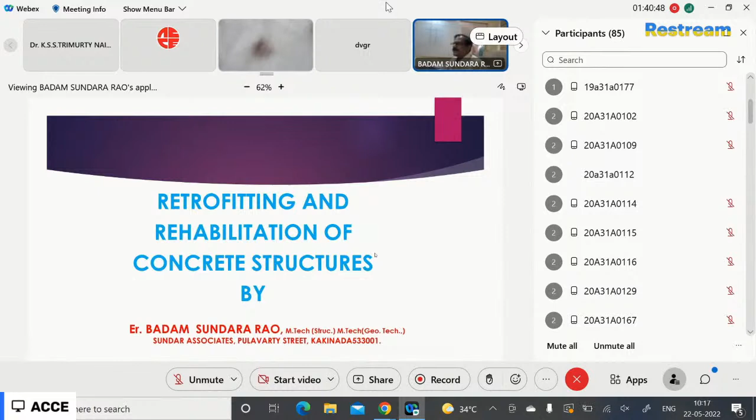This aspect also all engineers should remember. I'll conclude within 10 minutes, because our Trimurty Naidu garu has given me only 10 minutes time. No sir, take 10 minutes or 15 minutes, 20 minutes, sir, continue, no issue. I'll close at a faster rate, sir. Okay, not necessary, continue sir, no issue. Thank you, thank you.

The engineering which involves modifying existing buildings for structural behavior without hampering its basic intent of use is termed as retrofitting. Just reading out the definition, and I'll go through the explanation later. It becomes necessary to improve the performance of structures, including those facing loss of strength due to deterioration or which have crossed their anticipated lifespan.

The realization of retrofitting depends on the authentic cause and measures adopted to prevent its further deterioration. This development includes repair, retrofit, renovation, and reconstruction wherever required. Here, retrofitting may not always be the solution. Sometimes total reconstruction may be resorted to. That also we have to consider. There is a chance 100% retrofitting may not function well. In such cases, reconstruction is also to be opted.

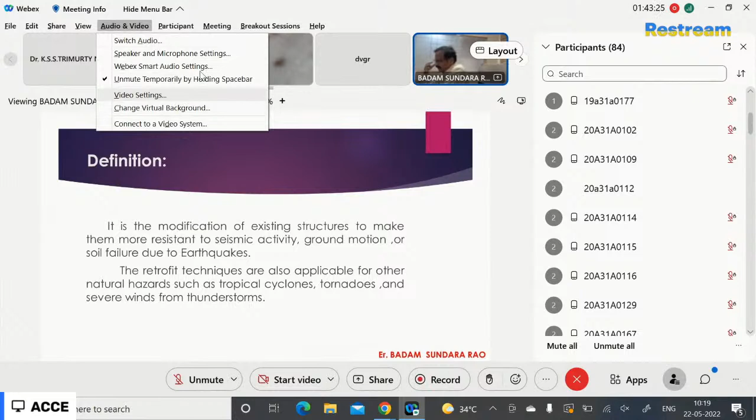It is the modification of existing structures to make them more resistant to seismic activity, ground motion, or soil failure due to earthquakes. One thing I have to say is that our Kakinada, or East Godavari, or if you take entire Andhra Pradesh, only from Srikakulam to Yalamanchili is in zone 2. The remaining entire Andhra Pradesh is now in zone 3.

But if you take the previous earthquake zoning, entire Andhra Pradesh was in zone 1. Though the buildings which were designed by the same engineer in 1990 may not be safe now based on the present earthquake zones. Likewise, the wind pressures also changed.

Previously, 150 kmph was the wind load taken into consideration, but now for sea coast areas, 200 kmph is minimum, and the K4 factor, which was introduced recently, is added. That K4 factor for sea coast area will be about 1.3. So in a simple manner, the wind pressures to be designed for are at 260 kmph. So from 150 kmph to 260 kmph, there is a drastic increase in the wind calculation.

Based on these parameters, if you want to check the structural stability, if they fail, there are so many methods to retrofit them. So though the building is presently healthy, from this changed structural environment, you have to redesign and retrofit the structures. The retrofit techniques are also applicable for other natural hazards such as tropical cyclones, tornadoes, and severe winds from thunderstorms.

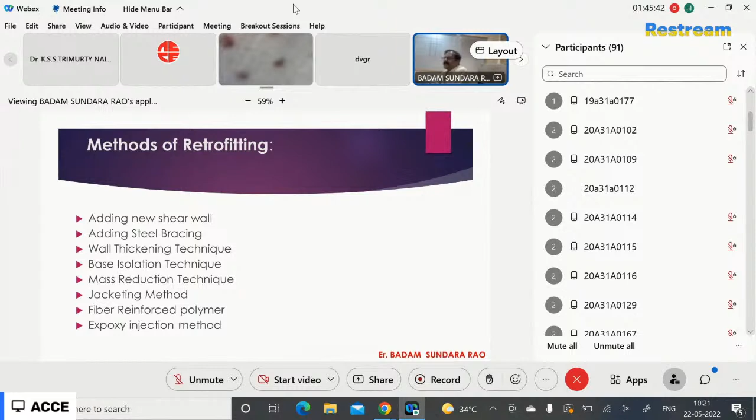Where can we apply this? For exterior walls, floors, roofs, to the ground foundation.

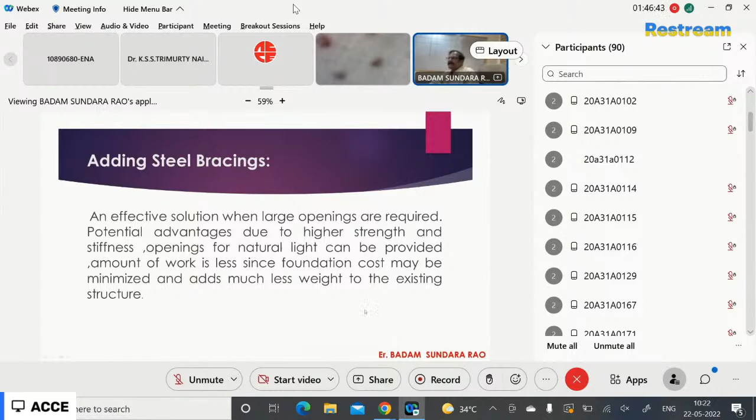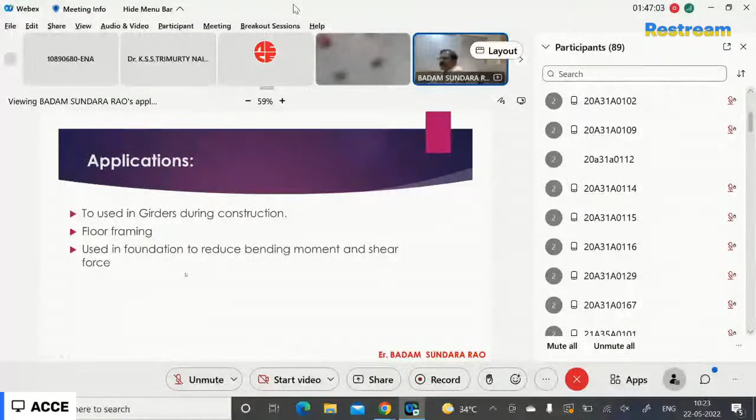This is a very effective method and most popular method also, to be used in girders during construction, floor framing, used in foundations to reduce bending moment and shear force.

Where can we apply this? For all RCC buildings, this technique can be adopted.

Applications: it can be applied in residential buildings, buildings of historical importance, monuments, bridges, etc. It was firstly implemented in New Zealand in 1974 and was first enforced in India in 2001 after the Gujarat earthquake. LA City Hall, with a height of about 138 meters in Los Angeles, is the tallest base isolated building in the world.

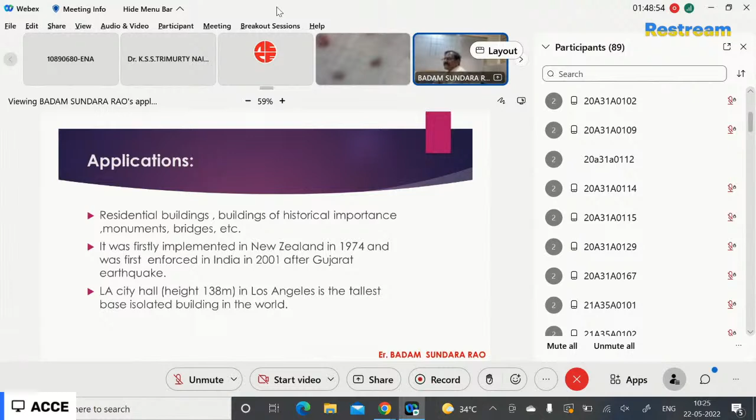Next is the mass reduction technique. In this method, for instance, by removal of one or more stories as shown in the figure, it is evident that the removal of mass will lead to a decrease in the loading, which will lead to a decrease in the required strength.

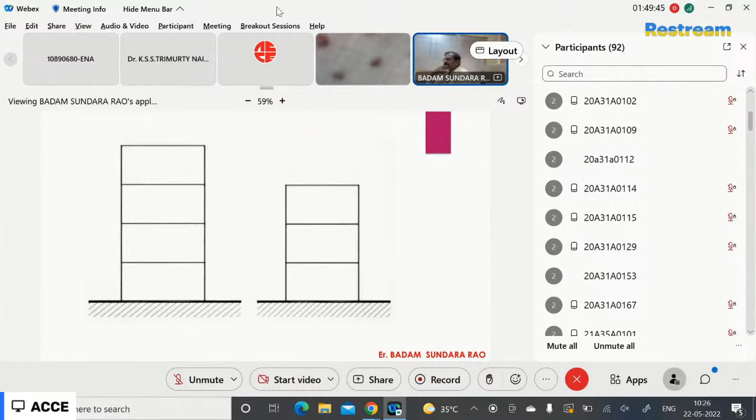Here it is a four-storied building. Because of this failure, what can be done is by reducing one floor, the building can be kept in a safe position. This is the technique which we have suggested for one building in Kakinada, which has got some settlement. But till now the owners have not taken any decision on that. When the calculations are made, we found that by removing one floor or 1.5 floors, the structure can be kept in a safe condition.

This is also a good and ideal method where the retrofitting cost is not to be incurred. In such cases, removal of one floor or two floors, depending on the load parameters and load calculations, is also an ideal technique.

Next is the jacketing method. This is the most popular method of strengthening of buildings and columns. There are different types of jacketing: steel jacketing, reinforced concrete jacketing, and fiber reinforced polymer composite jacketing.

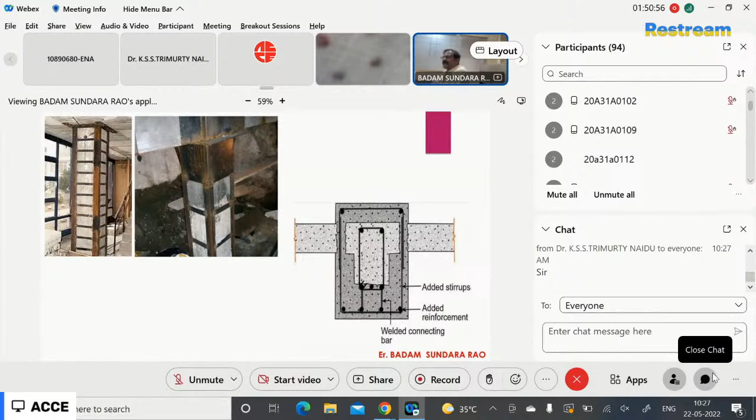This is the RCC jacketing. This is the most common, and we did this type of work for several old buildings which were retrofitted successfully, and they are performing very successfully. The same thing is suggested for this building which was supposed to be dismantled behind this Devi multiplex, but unfortunately that is in court, and till now they have not made any retrofitting.

These applications can be for columns, piers, piles, and may easily be employed in underwater applications also.

Next is fiber reinforced polymer. It is a relatively new technique to strengthen and repair damage of the structure. The application of FRP in concrete structures is being investigated for its effectiveness in enhancing structural performance both in terms of strength and ductility.

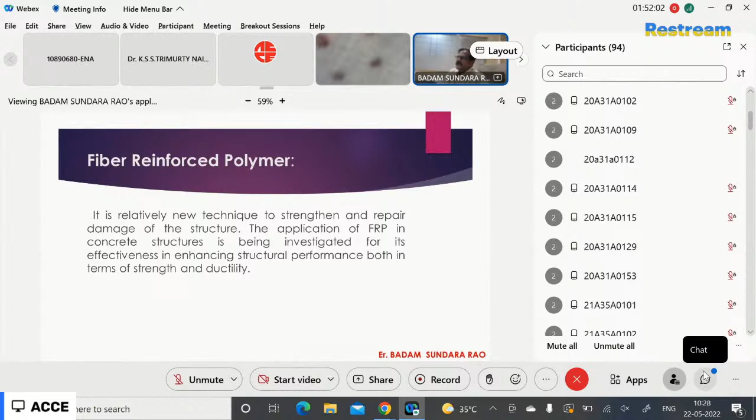This is one method, the carbon wrapping method. This is also very popular, and this technique was adopted for a bridge on the road going towards the airport to Rajahmundry. For that small bridge, retrofitting was done with carbon wrapping.

In Kakinada, the Hope Hospital building was first designed as a hotel project, and subsequently that was converted into a hospital. After that, the hospital people required one canteen building. To accommodate the canteen building, a galvalume sheet structure was proposed by us, and for that structure we retrofitted the beams with carbon wrapping in the ground floor, and that performed well. Still now, it's almost 6-7 years old work, and this has given excellent results without disturbing the entire building.

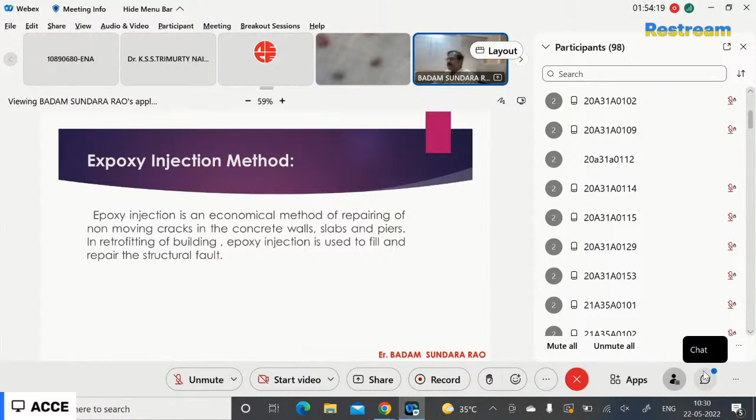Epoxy injection method is an economical method of repairing non-moving cracks in concrete walls, slabs and piers. In retrofitting of buildings, epoxy injection is used to fill and repair structural faults. This is a simple method and it is very effective where cracks are developed, giving excellent results. The applications are concrete walls, slabs, columns and piers.

Now coming to rehabilitation of concrete structures. Since very long, researchers have been investigating how to strengthen and rehabilitate structures, considering the deteriorating state of existing concrete and masonry structures worldwide. It's the need of the hour to find effective and economical techniques to rehabilitate old structures. Rehabilitation means to increase mechanical strength and durability. It can be measured by evaluating the deformation capacity of various retrofitted components of the structure. It is necessary to know the loadings, both functional and environmental, that the structure will have to withstand in future.

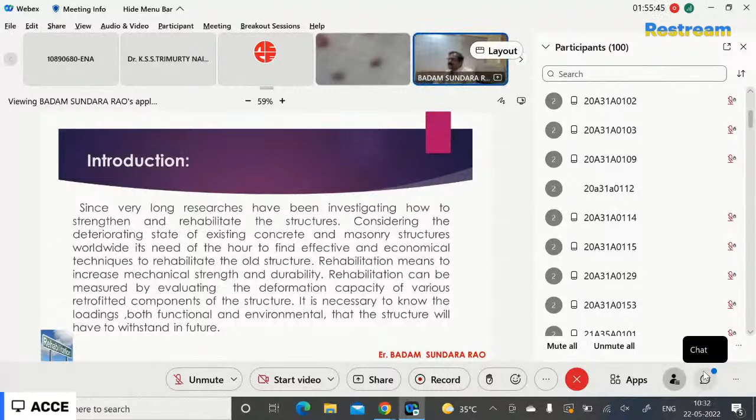One should remember that retrofitting and rehabilitation are not separate, they are together. Retrofitting is the process of rehabilitation. It means to increase the mechanical strength - tensile strength, compressive strength, flexural strength, shear strength, etc. - and durability. Durability is a very important aspect. It can be measured by evaluating the deformation capacity of various retrofitted components of the structure.

The methods of rehabilitation are guniting, shotcreting, concrete stitching, resin injections, dry packing, polymer impregnation, and vacuum impregnation.

Guniting refers to an artificial mixture of cement, water and sand applied to a mold to produce a dense, hard protective layer. Gunite is used to line tunnels and structures for construction applications such as sealing cracks, fissures and areas that could be sources of leaks and structural instability. Here you can see the application of guniting, where it can be used for sealing cracks, tunnels, fissures and areas.

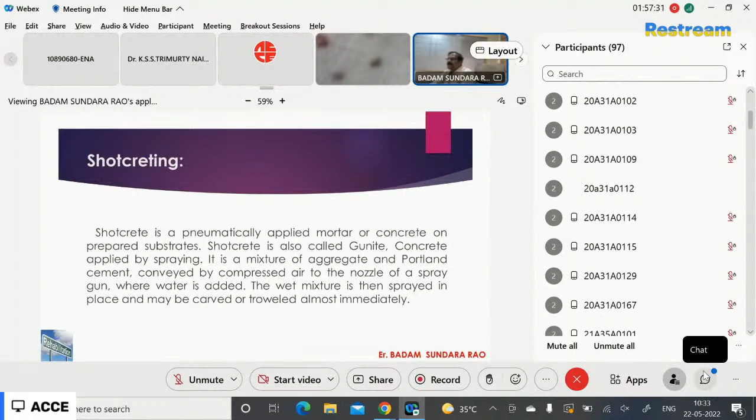Shotcreting is a pneumatically applied mortar or concrete on prepared substrates. Shotcrete is also called gunite. Concrete applied by spraying is a mixture of aggregate and Portland cement conveyed by compressed air to the nozzle of a spray gun where water is added. The wet mixture is then sprayed in place and may be carved or troweled almost immediately. This is a photograph of the process. It can be applied for concrete structures, high velocity, primarily on a vertical or overhead surface.

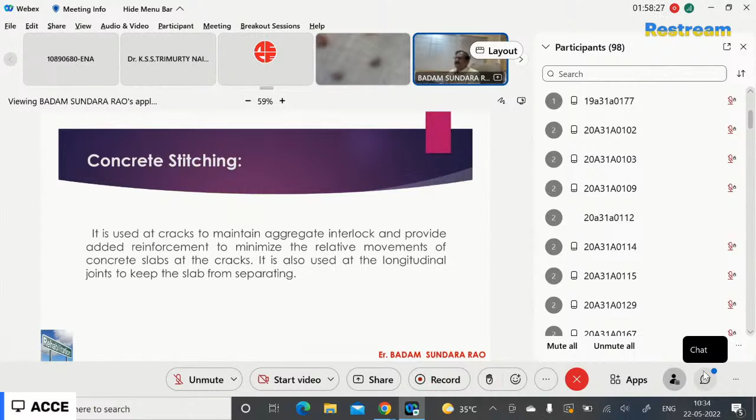Concrete stitching - where cracks are there, this stitching, like cloth stitching, can be done. This is also a very old technique, but still it is under usage because of its advantages. It is used at cracks to maintain aggregate interlock and provide added reinforcement to minimize relative movements of concrete slabs at the cracks. It is also used at longitudinal joints to keep the slab from separating. This is a photograph where this stitching can be adopted. The applications are in CC pavements and in slabs.

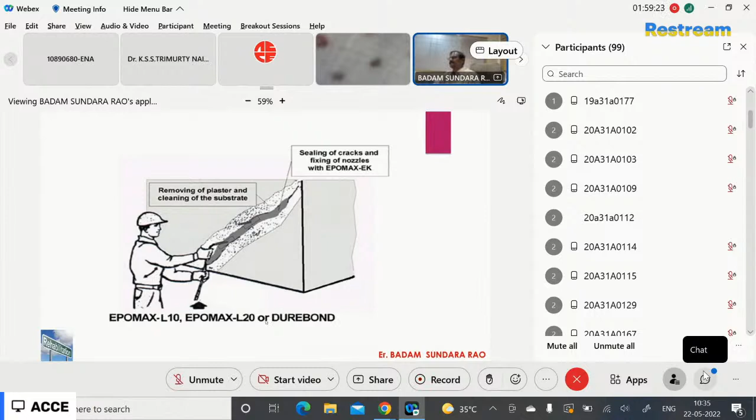Resin injection method is a form of grouting used for repair or reinforcement of underground pipes or tunnels. The process involves pressurized injection of material into cracks or other defects as part of trenchless rehabilitation efforts. Here, plastering is to be removed and the surface is to be cleaned. After that, sealing of cracks and fixing of nozzles with Epomax EK, Epomax L10, L20, Durebond, or equivalent. Applications are new built projects or existing structures, construction joints, and to provide a waterproof curtain behind the structural envelope. In such cases also this can be used.

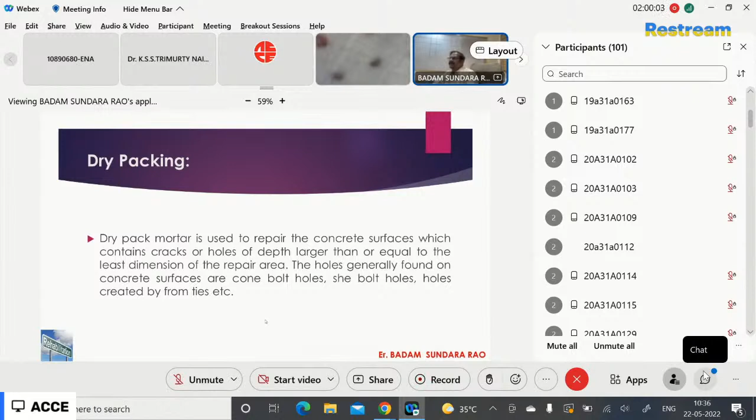The dry packing method: dry pack mortar is used to repair concrete surfaces which contain cracks or holes of depth larger than or equal to the least dimension of the repair area. The holes generally found on concrete surfaces are cone bolt holes, she bolt holes, and those created from form ties, etc. In such cases, this dry packing technique can be adopted. Applications are tile and brick placement, bed shower installation.

Next is polymer impregnation. The pre-polymers, low viscosity liquid monomers, are partially or completely impregnated within the pore system of the hardened cement composite structure. This is the method. Applications are bridge decks, irrigation structures, structural members, marine and underwater applications, nuclear power plants, sewage disposal works, waterproofing structures, impregnation of ferrocement products, etc.

Another method is vacuum impregnation, also known as porous metal sealing or porosity sealing. It is a process used to seal porosity in metal casting via the application of vacuum pressure. Vacuum impregnation can be effective in eliminating microporosity and macroporosity. The system to be adopted is always dependent on the requirement; based on that, the method is to be decided. This method is applicable for insulation systems and metal casting. Thank you.

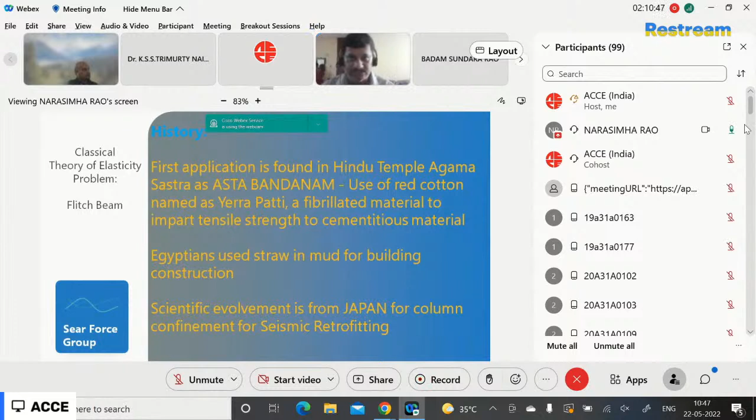But coming to the scientific evolution, the Japanese were the first to introduce this concept, in the form of retrofitting of a building structure that was seismically damaged. As a part of forensic structural engineering, they analyzed the building structure and found that the building was under-designed, and they wanted to retrofit the building. For that retrofitting, they tried the FRP wrapping system, and that was the first application in the modern engineering concept.

That is, we can see the ancient application is from the Asta Bandanam to the modern application of retrofitting by the Japanese, where they retrofitted the columns of a building structure. This concept of FRP is not new to the world. In the classical theories of elasticity, we have a problem with the flitch beams, in which the traditional timber structures are sandwiched with the steel plates.

That is, the wooden joist that was there was sandwiched in between the plates. The external ones will be the steel plates, and the internal will be a wooden joist. That may be a distressed wooden beam or a new beam. To strengthen that wooden beam, the steel plates were used. This is called the flitch beam concept. This is the traditional strengthening material that we have in the classical theories of elasticity. That same concept was adopted in the development of FRP systems.

That is nothing but the FRP system is not new concept-wise, but in the technology there are a lot of improvements that lead to a drastic evolution, especially in the engineering part of this question.

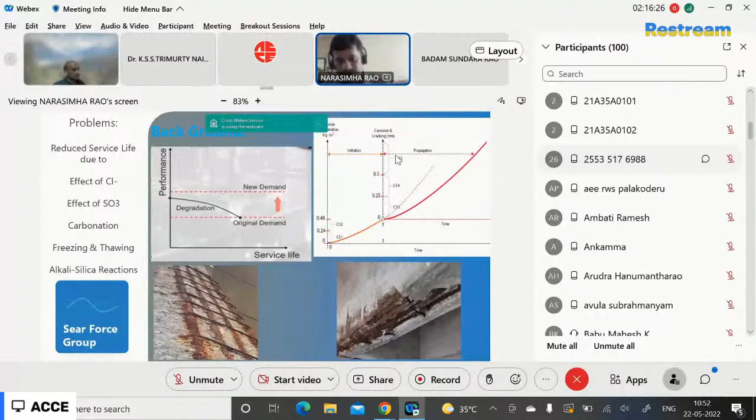The bottommost figures show chloride ion diffusion corrosion, which is the most common corrosion the world is facing. The entire world is almost covered with sea coast. In India too, we call it Peninsular India, Jambu Dvipa in ancient times, in which we have the largest sea coast. The first one is the Gujarat sea coast. After that, AP has the second largest sea coast.

Chloride ion diffusion is much more significant in determining the detrimental effect on any building structure, that is, the damage, when compared to other types of degradation like sulfates or carbonation. Carbonation is also there in combination with the chlorides. But when compared to alkali silica reactions and freezing and thawing, the chloride deterioration that concrete structures are facing is much more rapid and at an alarming stage. Therefore, this is the need of the hour for today's webinar presentation.

And the right hand top figure shows the chloride ion penetration at the initial stage, that is the initiation, and the subsequent propagation. The figure clearly shows a steep rise from the chloride initiation stage to its propagation level. That is, we have to prevent the ingress of chloride ions. Once they have entered the concrete member, the propagation is very rapid.

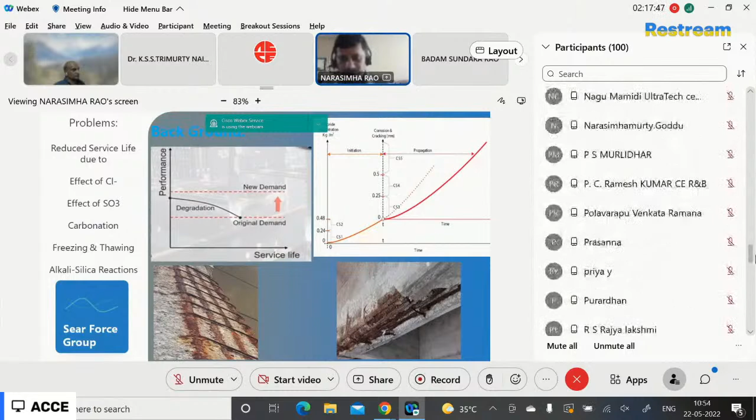Therefore, the FRP methods we have are nothing but the strengthening of existing members that were degraded, and also the retrofitting of members degraded due to various environmental effects, from the durability point of view. Fine. We'll see the exact reasons for the strengthening requirements of any structure. Just now we have seen the degradation effects and the necessity of fiber reinforced strengthening, and also the new strength requirements with respect to FRP strengthening systems.

Now we see the strengthening requirements of structures for various other purposes, like when there is an increase in the load carrying capacity. Just now we discussed a bridge designed for class A loading or class B loading, and subsequently required to be upgraded to higher loadings of class AA or class 70R. In such a case, the bridge is required to be retrofitted.

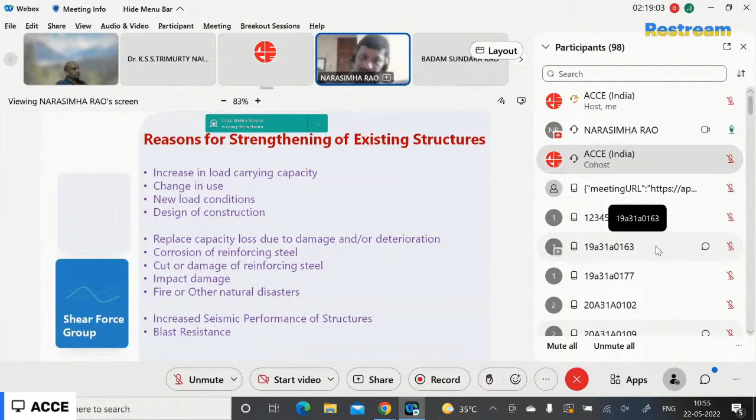Or when the building is intended for a change of use. Change of use is nothing but, originally it was designed for a residential application, and now it is modified for institutional use, like mercantile or institutions like hospitals, etc. In that, there is a change of class of loading as per IS 875 Part 2, the code pertaining to live load. Whenever there is a change in the live load classification, it definitely affects the stress level requirements in the various structural actions.

That is, the columns, beams, including the foundations and the slab system, have to survive the additional loading requirement in terms of increased live load coming on the structure. That is, an increase in the load carrying capacity. Whenever there is a change in the loading class on the structure, the building is required to be redesigned and strengthened. And also, when there is a change in use, like a change in the functionality of the building, we have to strengthen the building.

New load conditions. That is, whenever there are new load conditions, like there is a change in the

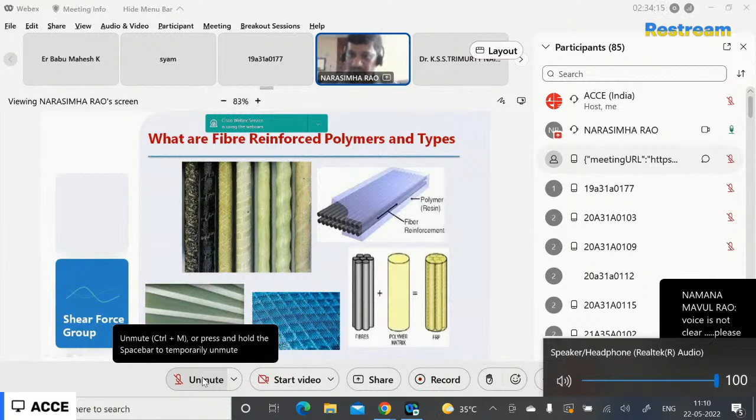Basically, a fiber reinforced polymer is a two-component material. One is in the form of a fiber reinforcement, and the second one is in the form of a polymer in which the fibers are embedded, and the fibers will be acting as one member bonded in between the polymer, the matrix we call it. This polymer will protect against environmental degradation and other effects on the fibers. Thereby, it gives some protection to the fiber reinforcement.

The main strength component is coming from the fiber reinforcement, whereas the external resin or the external matrix is to bind all the fibers that are there in the constituent. That is, in FRPs, we have two components. One is in the form of fiber reinforcement, second one is in the form of a resin matrix, which constitutes the total fiber reinforced system.

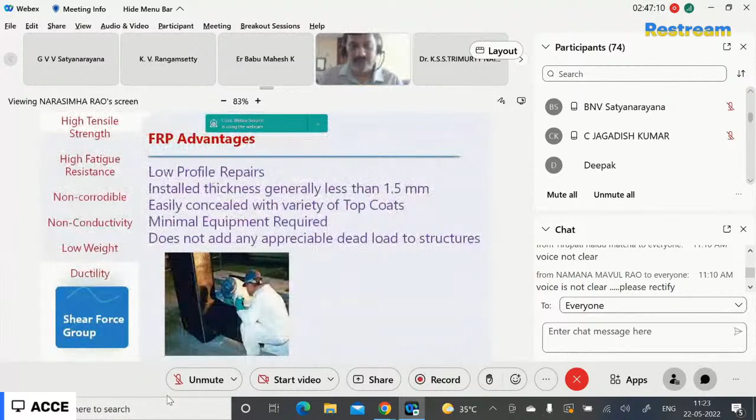What are the various FRP materials used in actual structural engineering applications? This understanding is also necessary for the selection of appropriate FRP materials. Why? Because the properties of different FRPs are different, depending upon your structural requirement—whether it is seismic retrofitting, strength requirement, or actual stress requirement. Depending upon the application and loading requirements, you have to select a suitable FRP material so that it is appropriate for the given design requirements. Generally, there are a variety of FRP materials available.

The most popular ones are carbon fibers, glass fibers, and aramid fibers. The fourth one, of somewhat importance, is basalt fibers, generally used for FRP rebar making.

Carbon fibers have very high strength, generally used for beam strengthening, and sometimes carbon fibers are used for shear strengthening of beams.

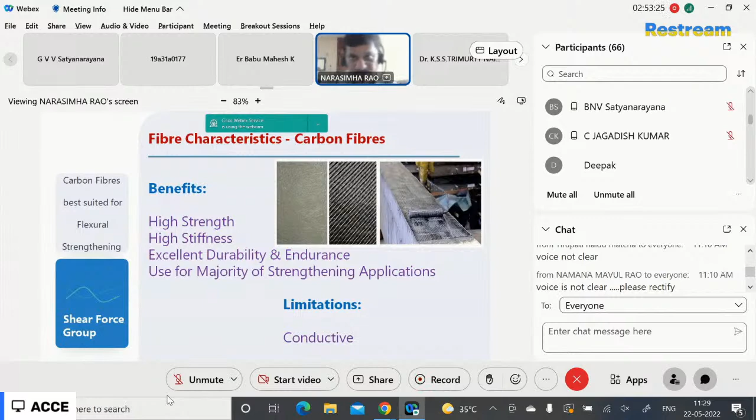And when coming to the exact requirement of such applications, for flexural strengthening applications of beams, generally carbon fibers are more suitable.

When coming to glass fiber, this is also in parallel with carbon fibers as an advantage, but the only problem is with creep. As just suggested, glass fibers will be subjected to more creep; they are highly prone to creep behavior. Therefore, only under transient loadings, like seismic retrofitting due to earthquake loading or certain other requirements, glass fiber retrofitting is suggestible.

The basic advantage with glass fibers is that they are non-conductive, hence whenever there are conductive application restrictions, glass fibers are the best suitable option. Regarding stiffness, it is somewhat lower when compared to aramid and carbon fibers. It has somewhat good stiffness, but the basic stiffness is lower compared to aramid and carbon fibers.

Regarding the matrix components, the matrix plays a very important role in transferring stresses from the parent structural member, that is the parent RCC beam, to the fibers. The fibers are the load-carrying members, taking the entire stress. But for stresses to reach the fibers, they have to be transferred to the matrix, which in turn transmits them from the RCC parent material to the fibers. Therefore, the strength of the matrix plays an important role.

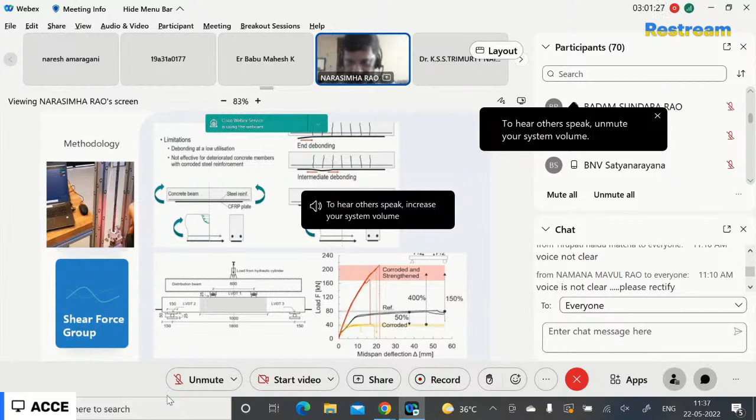The load applied at the midspan is a 2-point loading, similar to a flexural loading under 2-point test. The midspan deflections are measured with LVDT equipment. Once we measure the load-deflection response, there is a drastic 50% reduction in load when there is approximately 50% degradation of the area of reinforcement.

Once we compare this beam specimen's moment-deflection relationship to the FRP strengthened system improvement, there is an increase of 400% improvement. That concludes that the FRP system has much more advantages and efficacy in improving the load carrying capacity, that is the moment of resistance.

Almost a 150% improvement can be achieved with respect to the uncorroded beam specimen, and an increase of 400% can be attributed when compared to a specimen with 50% or 20% corrosion in the steel reinforcement. Therefore, these load deflection curves give a qualitative assessment of the improvement from FRP strengthening efficacy.

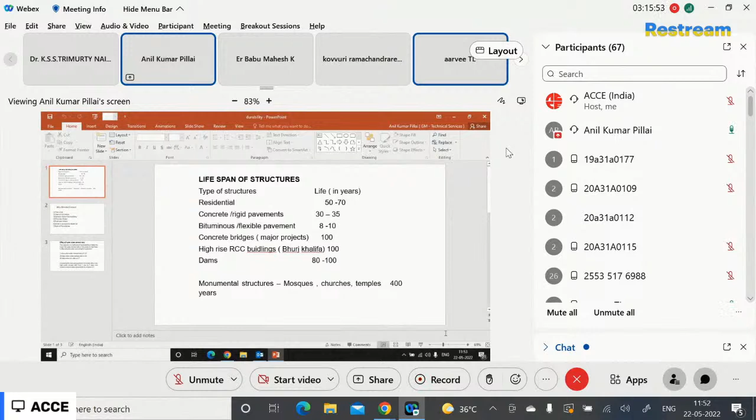Some of the structures like residential structures would be around 50 to 70 years, maybe more than that. Concrete rigid pavements maybe 30 to 35 years. Concrete bridges maybe up to 100 years. High-rise buildings more than that. And monumental structures are designed to have a lifespan of more than 400 years. So the idea is that based on the lifespan of the structure, the durability of concrete structure has to be designed, and it has to be ensured that whatever is required is implemented at site. That is one very important thing we need to keep in mind, because ultimately every client, every customer, every institution wants the lifespan of the structures to be longer and as per the designed one.

Now, to come to the specific topic of why blended cement. When we talk about blended cement, we know that blended cement means either Portland pozzolana cement or Portland slag cement, wherein some kind of blending material is added. We had ordinary Portland cement, as all of us know, which started with OPC 33 grade, then came 43, 53 grade and so on. But the idea of blending or adding some pozzolanic material like fly ash or slag started long back. It is a practice that has been there from time immemorial. And the reason is that we need this kind of adding or blending not only from the environmental point of view, but also from a qualitative perspective.

And as all of us know, the Indian cement industry as of now has more of blended cement, like more than 80% of whatever cement is being produced in our country is blended cement. It could be either Portland pozzolana cement or Portland slag cement.

So the idea behind having this blended cement is that there are certain benefits one will get, in the sense that whatever free lime is generated due to the hydration of ordinary Portland cement with water can be taken care of by the blending material. As all of us know, cement hydration produces CSH gel and calcium hydroxide. That calcium hydroxide is what we call the free lime. That calcium hydroxide is not considered to be conducive to concrete structures, so that free lime or free calcium hydroxide needs to be taken care of.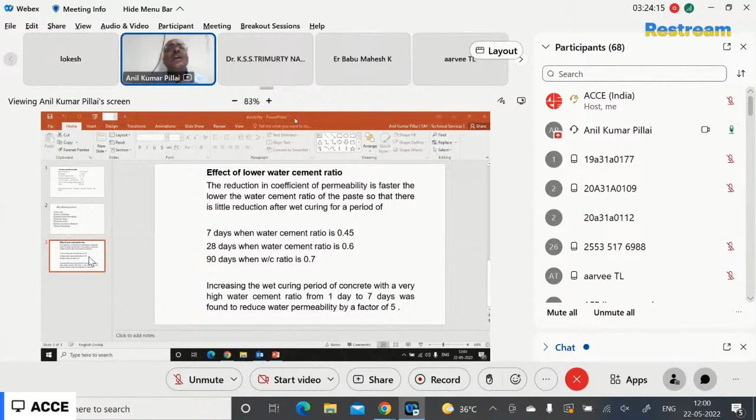Now, when we are using chemical admixtures, it is very important that we do a sufficient number of trials at site. That is how we can maintain the durability of concrete. Without that, I don't think we can maintain the durability of concrete. So I thought that I will share these very important aspects as far as durability of concrete is concerned. This is what we can take over from here.

We can do a lot of work as far as concrete mix design is concerned. We can look at economical mix designs, because when we are talking about economical mix designs, there should not be too much compromise on cementitious material content, because many times we are not looking at the exposure conditions, those we have in IS 456, ranging from mild, moderate, severe, very severe, extreme conditions.

So many times what happens is that even for the same grade of concrete, irrespective of the exposure conditions, you will find that a minimum cement content is being added, sometimes 300, 320, but if you look at the extreme conditions of exposure, 300 or 320 kg per cubic meter is not the right cementitious content. It has to be enhanced, it has to be increased. Those are the considerations we need to keep in mind to ensure the concrete is durable.

And even when we are going in for a higher grade of concrete, say for example M50, M55, M60, we will find that the upper limit of cement content is 450 kg per cubic meter. To take care of that, we have to add cementitious content, and that cementitious content is nothing but the blending materials we are talking about. So when you are using blending materials, you can go much beyond the 450 kg per cubic meter of cement content mentioned in the IS code.

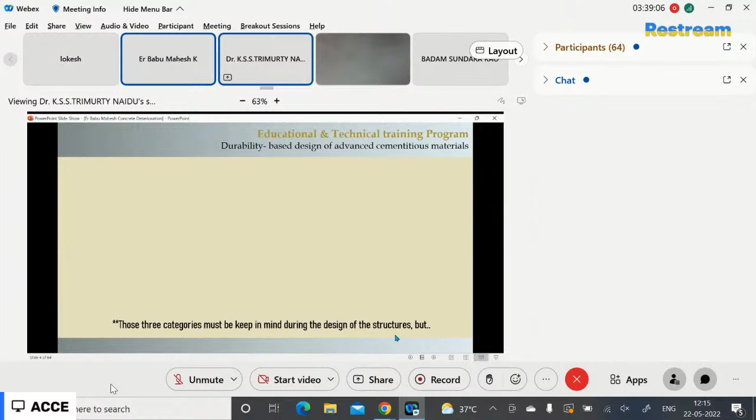Responding to the actions assumed in the design, both under persistent combinations and under accidental or exceptional situations, these performances have to be guaranteed with an appropriate level of reliability. And finally, sustainability. It means the ability of a material or structural member to contribute positively to fulfilling the present needs of humankind with respect to nature, society, and humans, without compromising the ability of future generations to meet their needs in a similar manner.

Those three categories must be kept in mind during the design of structures. But as far as current practice is concerned, it is very hard to fulfill those three categories of performance due to inadequate knowledge about the interaction of materials with exposure conditions during the design phase. The second one is compromising on the quality of concrete and lack of good construction practices, which leads to structural failure. Next.

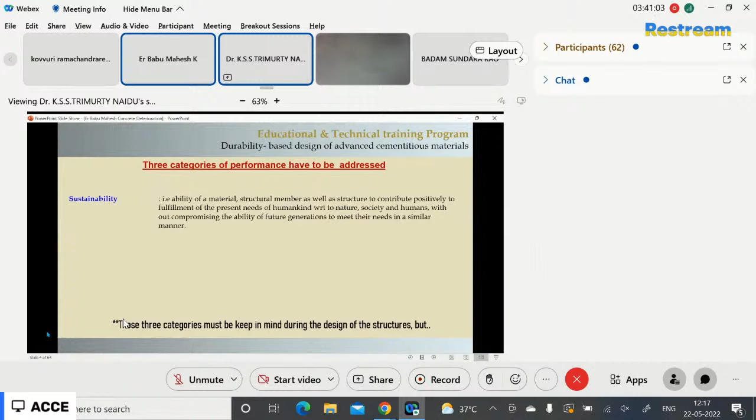Recent studies show that many buildings have collapsed or been damaged to various degrees for a single reason: concrete deterioration. Of these, 40% of structural failures are reported to be due to corrosion of the embedded steel reinforcement in the concrete. In this regard, I am going to show a few case studies recently reported at various locations. This is the NBCC Society building at Gurgaon, New Delhi. This is a 5-year-old building, recently reported in many social media.

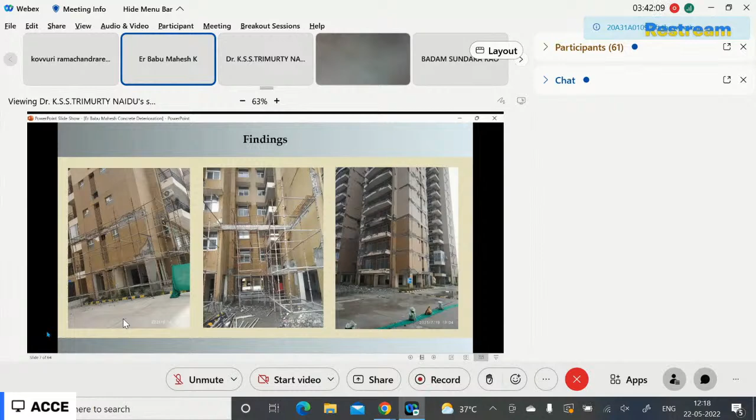So next. This project was started in 2012 and work was completed in 2017. As per the findings, many structural cracks were found in the building because substandard material was used for this construction. Recently, the central government passed an order for the residents to vacate the building as it is not safe for living. All the RCC elements got deteriorated due to deterioration of the concrete for various reasons.

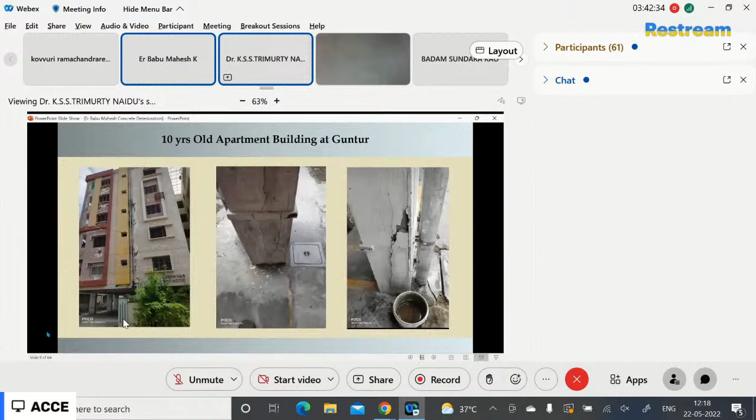In the second case study, this is a 10-year-old apartment building at Guntur. You can see the column failures in this picture. In this case of the Guntur apartment building, we can find wide vertical cracks on the column at the cover concrete location, falling of the plaster work over the column, disintegration of the cover concrete, and corroded steel reinforcement was seen inside the column during my physical verification.

In the third case, a five-story building suddenly collapsed at 8:30 p.m. in East Delhi. One of the reported reasons was that seepage from the surface drain and stored salts might have weakened the load-bearing concrete column. Capillary rise of salt ions into the concrete up to the ground floor gave way to corrosion of steel at the beam-column junctions. Next.

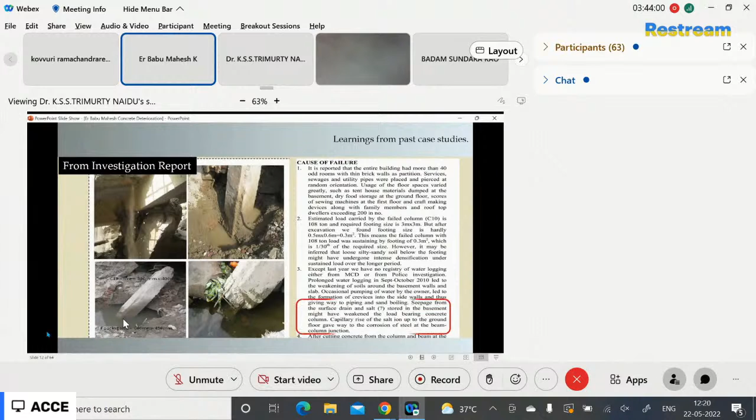The main cause of failure reported was that groundwater might have been used for this construction without any testing. In this regard, I want to note to all the engineers that many cement firms have come up with very good technical services departments providing very good services in testing of water and cube casting at the site. I request all the engineers to utilize these services for better construction and durability of the structure.

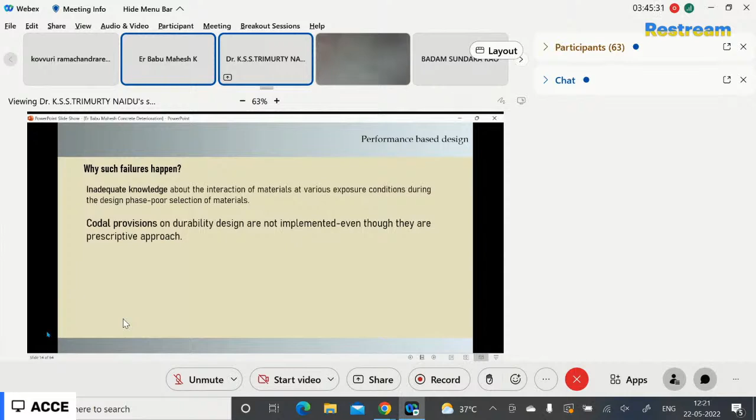The second one is that environmental exposure conditions were not taken into consideration. And poor quality control and bad construction practices have been reported in the above cases. Next. Why do such failures happen? Inadequate knowledge about the interaction of materials at various exposure conditions during the design phase leads to poor selection of material. Another one is that codal provisions on durability design are not implemented even though they are a prescriptive approach. Next.

In our traditional BIS code, the approach is prescriptive based. They have given durability aspects with subdivisions in exposure conditions like mild, moderate, severe, very severe, and extreme conditions. But that is a prescriptive based approach.

Experience from practice shows that routes based on a combination of experience, research, and intuition have a lot of drawbacks in this prescriptive approach, often resulting in not adequately durable designs. There is a lagging in implementation of the code of practice in reality.

Prescriptive based approach has some limitations. There is no reliable prediction of structure service life, and inadequate description of environmental conditions. There is no clarity on classification of environmental conditions. Other codes like Euronorms, Australian standards, and FIB model codes have very clear definitions about the classification of environmental conditions.

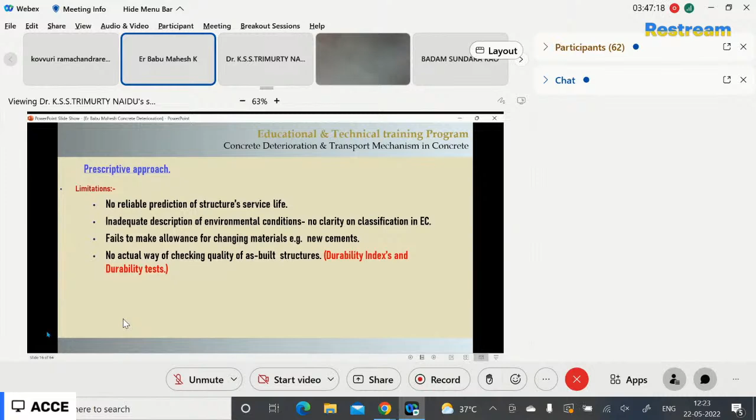Now BIS has come up with a very good classification system in our upcoming IS 456. They are incorporating the carbonation effect in our upcoming model code. First, let us make some perception toward cement and concrete.

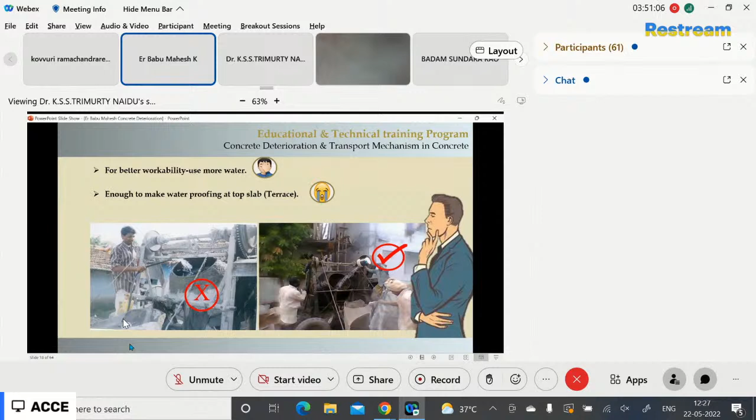Deterioration of concrete means disintegration of constituents in the concrete mix, or degradation due to external media, known as deterioration of concrete. Hence many concrete structures are not withstanding the original design life of the structure. The causes of deterioration in concrete are mainly due to physical action, chemical action, mechanical action, and defects.

In today's presentation, I am going to stress chemical action and construction defects, specifically chemical action and construction clauses.

Concrete deterioration: concrete can be penetrated through its pores by gases like nitrogen, oxygen, and carbon dioxide, and liquid substances like water in which ions are dissolved.

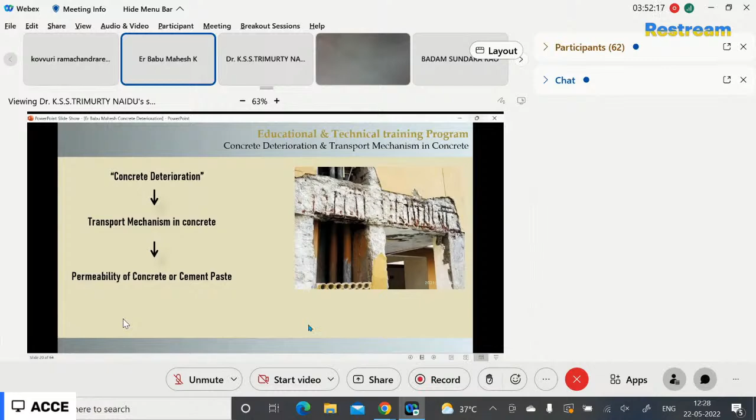Permeability - concrete deterioration is influenced by the transport mechanism in the concrete. That transport mechanism is influenced by the permeability of the concrete. Let us go into permeability.

In general, the term permeability indicates the property of concrete to allow the ingress of these substances.

The permeability of concrete is not only important for water retaining structures like elements such as pipes, canals, and tanks, but it is also a decisive factor in the durability of reinforced concrete.

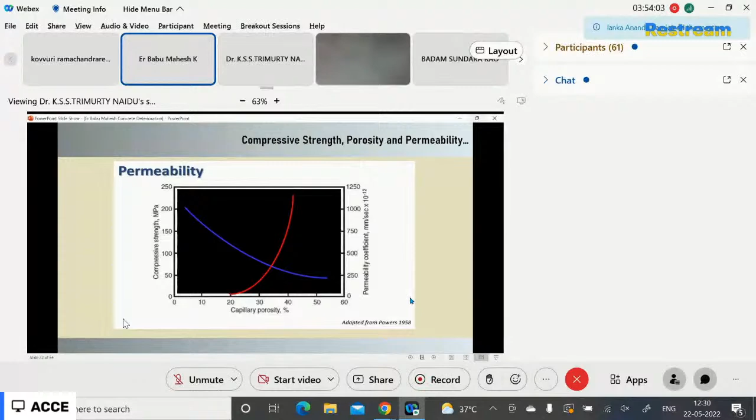This slide speaks about strength, permeability, and porosity. If porosity increases, the permeability of the concrete increases, and correspondingly, the strength of the concrete decreases.

The additional CSH gel in this system helps in pore refinement in the cement paste and makes the concrete more impermeable than the Portland cement paste system.

The porosity and permeability of the concrete will decrease over a period of time, that is at 28 days, due to formation of CSH gel during the hydration process, to some extent, in ordinary Portland cement.

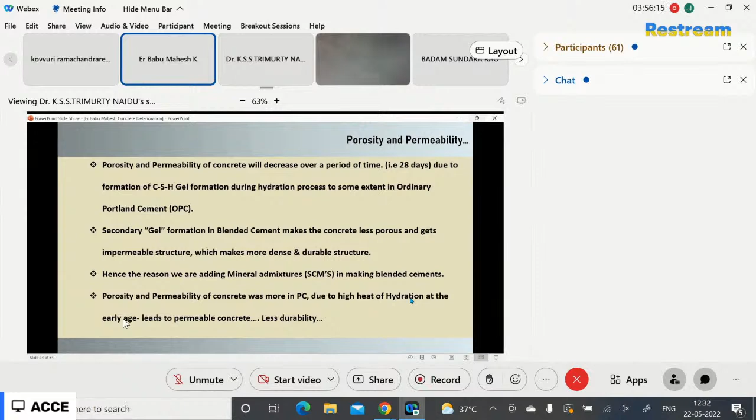Chemical action is caused due to sulfate attack, acid attack, alkali aggregate reaction, corrosion of reinforcement, penetration of carbon dioxide into the concrete (carbonation), and chloride attack. The chemical deterioration mechanisms are carbon-induced corrosion, chloride-induced corrosion, and sulfate attack.

Next. Now, the carbonation mechanism. Carbonation means carbon dioxide attacks the concrete. This picture shows...

Concrete has some pores, and those pores have been filled with some pore solution. When carbon dioxide ions diffuse down into the concrete, it converts the pore solution into carbonic acid. This carbonic acid then reacts with the calcium hydroxide, forming calcium carbonate.

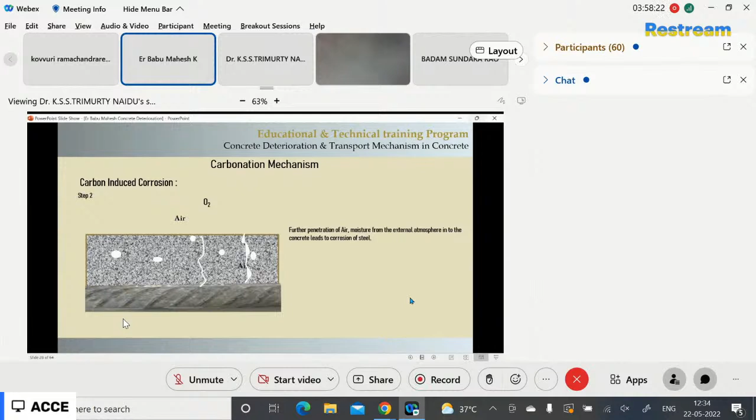So in this system, further penetration of air and oxygen from the atmosphere into the concrete creates more problems for the reinforcement. It leads to cracks in the column and spalling of the cover of the column.

We can see the passivated layer of the steel reinforcement, and on the back side... Okay.

This picture shows 4 concrete specimen cubes. Those specimens were cast at site and cured at outdoor conditions for 1 day, 3 days, 7 days, and 28 days to determine the carbonation depth of each specimen in real exposure conditions.

From this study, we came to know that the rate of carbonation is lower in the 28-day cured sample compared to all the 3 other specimens. This means curing influences the carbonation rate. We can avoid such carbonation in concrete by curing it as suggested by the IS code.

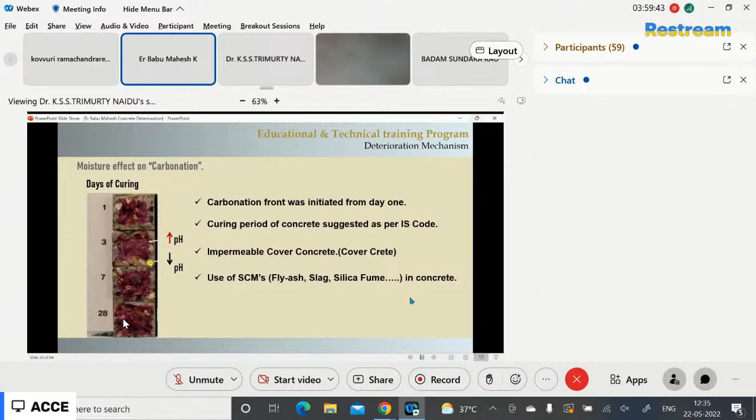At higher RH conditions, the pores in concrete are filled with moisture. In such conditions, it is very hard to diffuse gaseous ions into the concrete. Hence, the carbonation rate at the coastal region is very low compared to other regions, where the relative humidity is around 90 to 95.

Next. How do we stop carbonation? Make the concrete impermeable. Proper cover should be maintained as per the IS code.

Use SCMs like fly ash and slag and other supplementary cementitious materials, and maintain a low water-cement ratio. Use water reducers to achieve a low water-cement ratio, good compaction, and proper curing.

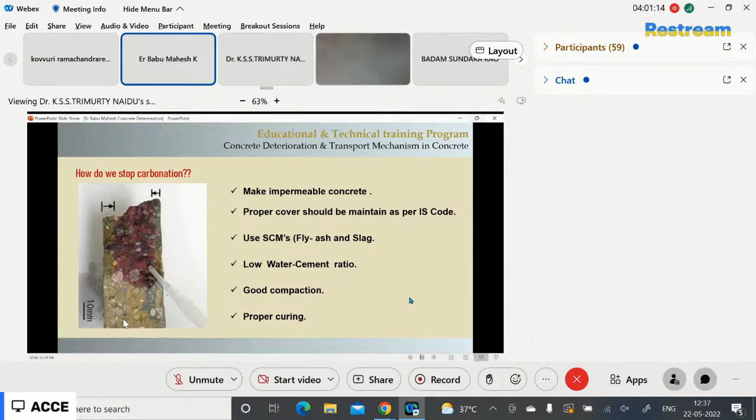Next. This case study taken for this presentation is carbonation-induced corrosion. This is a staircase from a road rail bridge at Rajahmundry. The site condition was reported to be hot and humid.

Back. Site conditions were hot and humid, and spalling of the cover with corroded reinforcement exposed to the atmosphere was observed. Next.

From this figure, we can understand the carbonation process from this picture of the staircase. We can observe the spalling of the cover and the corroded steel throughout the periphery of the staircase.

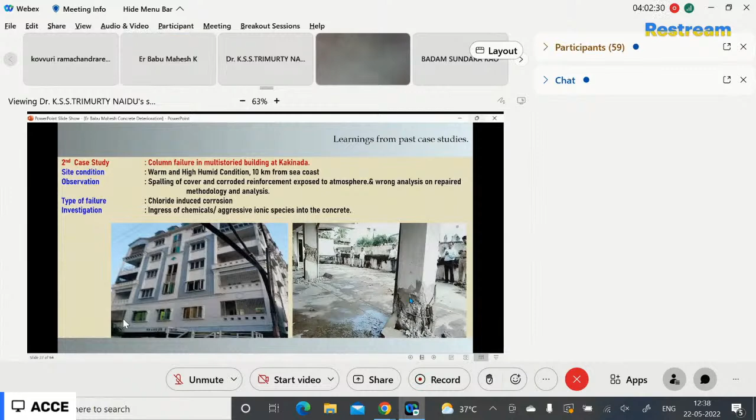Back, sir. Okay, so back. Okay, back. Okay, okay.

So further penetration of chloride ions into the concrete leads to pitting corrosion of the concrete. In such cases, the embedded reinforcement loses its diameter.

This is one case we have reported and taken photographs near Kakinada. Recently, one apartment building's columns have been restricted. During the visit I took some photographs, and we can see that pitting corrosion happened in the main reinforcement parts, because of chloride diffusion into the concrete.

Next, this is a case study I am going to speak about.

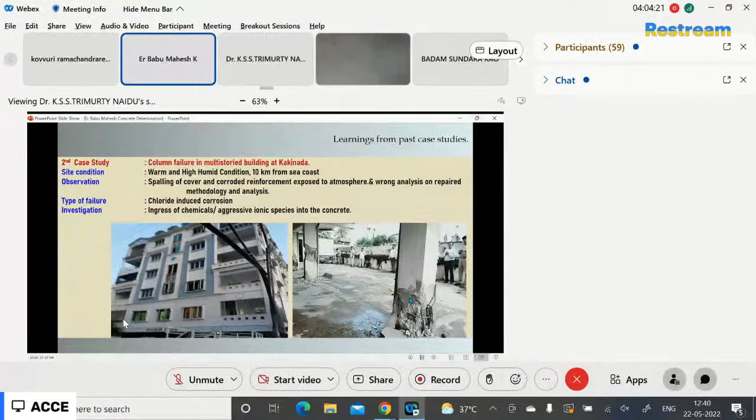In this column, failure is because of sulfate attack and chloride attack. The sulfate attacks are from the groundwater. Kakinada region has a very sulfate-rich environment in groundwater. These sulfate attacks have taken place by wick action and sorption, and chloride penetration has happened due to diffusion mechanism. So three transport mechanisms are involved in this case.

So next. Next. Next, sir. Okay, yes sir. Back, sir. Back column. Okay. Next, back. So it is, sir. Okay, so.

This slide speaks about the chloride diffusivity of cement paste and concrete with various binder systems and varying water cement ratios. Ordinary Portland cement with 0.4 water cement ratio has a diffusivity of 2.6, with 0.5 ratio diffusivity is 4.4, and with 0.6 ratio the diffusivity of chloride ions is 12.4.

If you take blended cement with 30% replacement of Portland cement, take fly ash at 0.5 cement ratio, diffusivity is 1.47. This is a huge variation between ordinary Portland cement and blended cement.

At the same time, concrete made with 100% Portland cement at 0.4 water cement ratio has diffusivity of chloride of 18. With 40% replacement by supplementary cementitious material like fly ash at 0.4 cement ratio, the value is 2. So there is about an 80 to 85% variation in diffusivity of chloride ions.

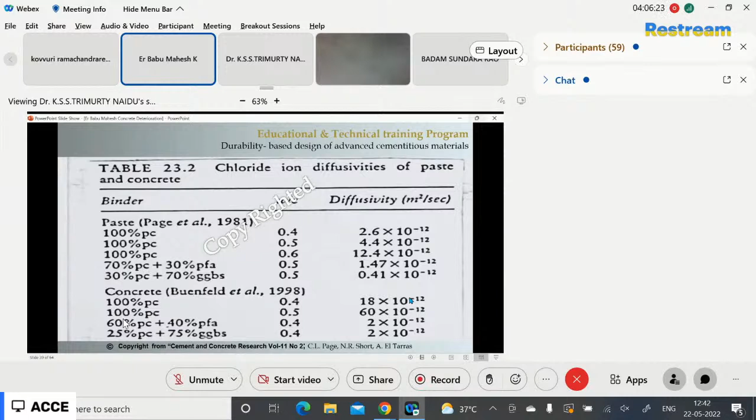Nowadays, cement firms offer technical services free of cost to their customers. They give good services like chloride concentration tests on groundwater, pH tests for water, and compressive strength tests of concrete cubes to ascertain the quality of cement. Such technical services are available and should be utilized. Apart from that, cement companies have come up with products with various combinations and percentages of mineral admixtures to fulfill all requirements of durability as well as compressive strength.

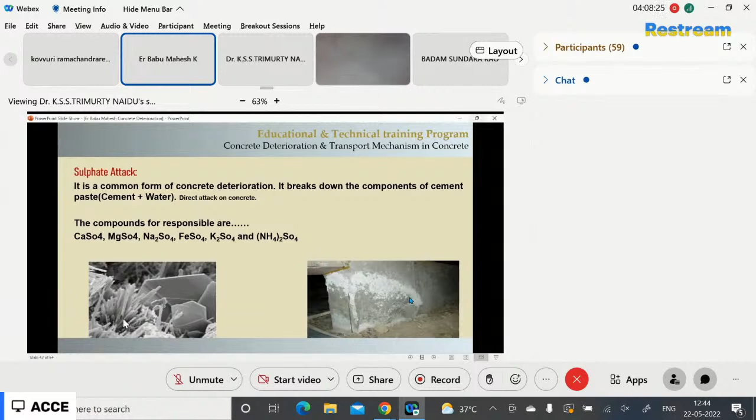Next, sulfate attack is a common form of concrete deterioration. It breaks down the components of the cement paste, like cement plus water, so this attack is a direct attack on concrete. The main compounds responsible are calcium sulfate, magnesium sulfate, sodium sulfate, iron sulfate, potassium sulfate, and ammonium sulfate. Among these compounds, the magnesium sulfate ion is the more dangerous ion. Sulfate attack types are mainly physical sulfate attack and chemical sulfate attack.

Next, physical sulfate attack means when salts precipitate at the surface of the concrete, that comes under physical attack. In chemical attack, when sulfate salts react with the cement paste, they create new compounds that are expansive and damage the concrete.

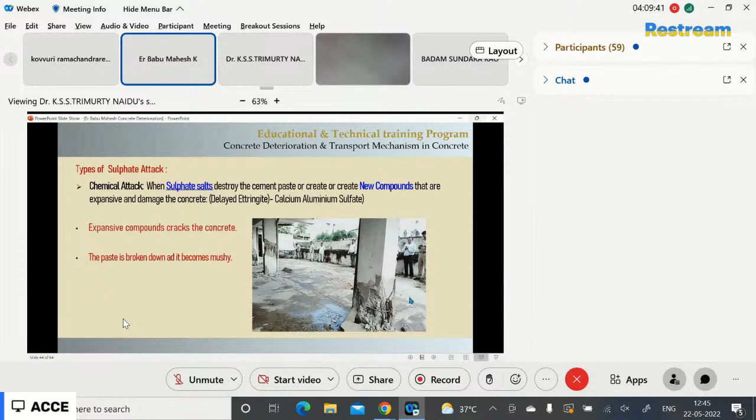That new compound is calcium aluminum sulfate, also called ettringite. This is a most expansive compound. It creates cracks in the concrete. In such conditions, the paste breaks down and becomes mushy. Such conditions happen nowadays in the collapse and distress of the column.

In hardened concrete, calcium aluminate hydrate can react with sulfate from outside, forming calcium sulfoaluminate, which can cause an increase in volume up to 227%. That is very expansive. So we use low C3A content cement, SRC cements, where the sulfates are rich in the soil.

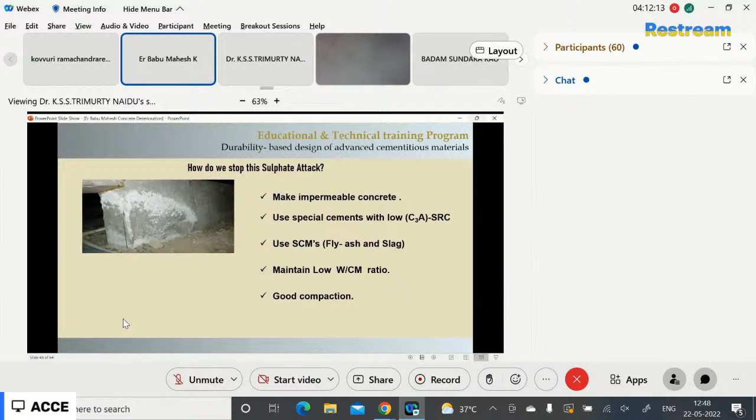Otherwise, there is no use of SRC in such cases. How do we stop this sulfate attack? Make impermeable concrete, use special cements with low C3A like SRC, use SCMs like fly ash and slag, maintain low water cement ratio and good compaction. Next.

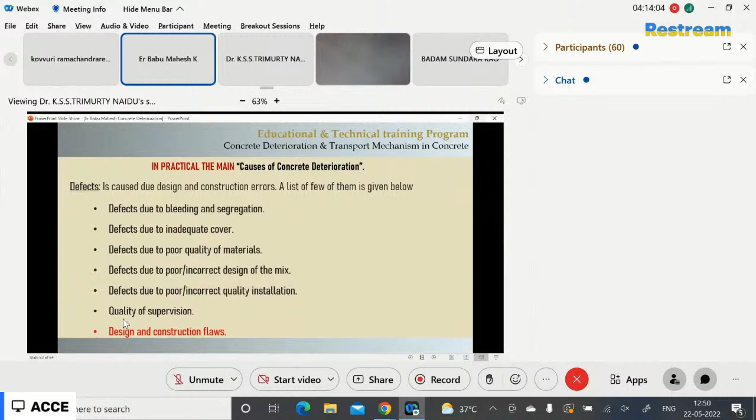Defects are caused due to design and construction errors. Defects due to bleeding and segregation, defects due to inadequate cover, defects due to poor quality material, defects due to incorrect mix design, defects due to incorrect quality installation, quality of supervision, design and construction flaws. These are, in practice, the main causes of concrete deterioration. We must take care of these points and keep them in mind while executing the project. Next.

Design and construction flaws. Well designed and detailed concrete structures will show less deterioration in comparison with poorly designed and detailed concrete in similar conditions. The beam column joints are particularly prone to defective concrete if detailing and placing of reinforcement is not done properly. Inadequate concrete cover may lead to carbonation depth reaching up to the reinforcement, thus increasing the risk of corrosion of the steel reinforcement.

While designing, we make sure to keep in mind that the concrete must be designed for 50 years. If we are going to design a building for 50 years or for 75 years, then the concrete cover must be designed as per the design life given to the structure. To make the cover impermeable, proper cover compaction and proper curing must be done.

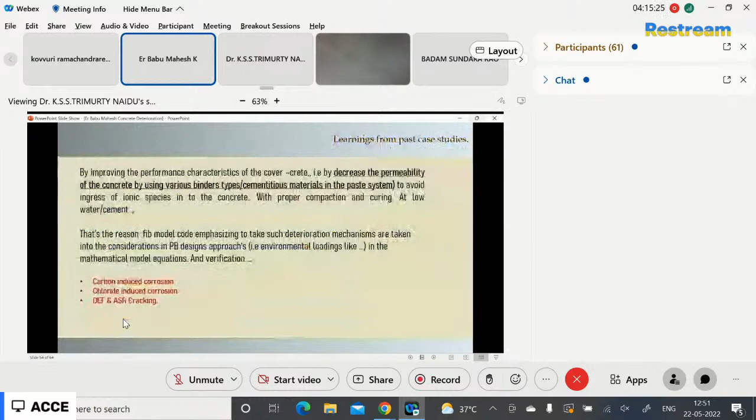Next. So, by improving the performance characteristics of the cover, by decreasing the permeability of the concrete, by using various binder types and cementitious materials in the paste system to avoid ingress of ionic species into the concrete, with proper compaction and curing at low water cement ratio. That's why the FIB model code emphasizes that such deterioration mechanisms are taken into consideration in the performance-based design approach.

The following deterioration processes have been linked with the performance-based design approach: carbonation-induced corrosion, chloride-induced corrosion, delayed ettringite formation (DEF), and alkali aggregate reaction.

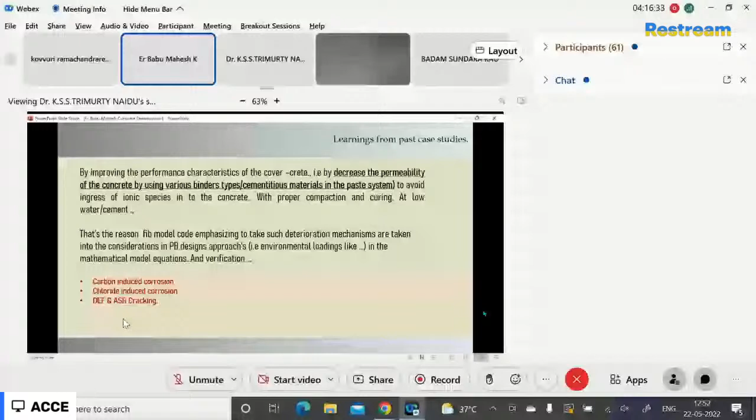Nowadays, concrete is an extended family of materials, with very different properties and characteristics as per performance based specifications. Nowadays we can make concrete strength from a minimum of 2 MPa to 200 MPa: high strength concrete, high performance concrete, ultra high performance concrete, fiber reinforced concrete, lightweight concrete, high density concrete. There are many varieties of combinations. Next. Next.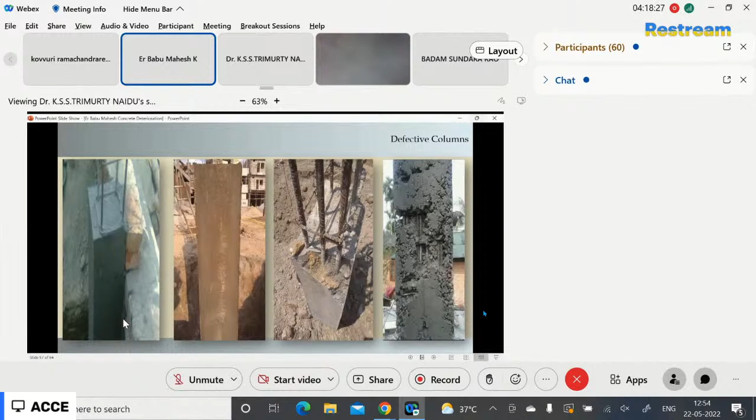So, latest developments in various codes. Next, if we look at Euro norms, they are the first to link exposure condition to deterioration mechanism. In British standards, prescriptive based requirements for 50 and 100 years. SA code prescribes requirements, not as much depth as EN standards.

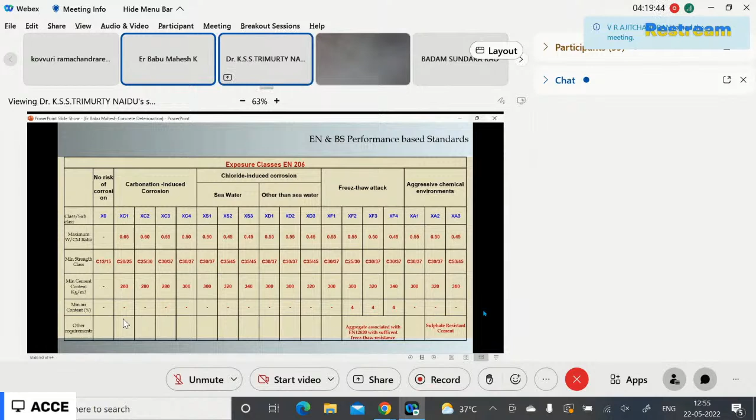So here I'm going to highlight some upcoming IS code revisions. They have given some sub-classification in exposure condition: carbonation induced corrosion, chloride induced corrosion, structures exposed to seawater, structures not exposed to seawater, and normal structures, and chloride diffusion coefficient also they are incorporating now. And note, it is better to mandate a few durability tests for concrete for durable construction.

Next, in this example they have used triple blended cement. They have used fly ash of 13%, silica fume 10% of binder for the superstructure, with a slump of 100 mm. For pile foundations, they have taken some durability parameters into consideration.

Water permeability they have given for 5 mm. The maximum absorption is 1.5%, but test results show 0.7%. RCPT value must be 1200 coulombs, but in site conditions we got 590 coulombs. The SCMs used are fly ash 37% and silica fume 7% for the pile foundations.

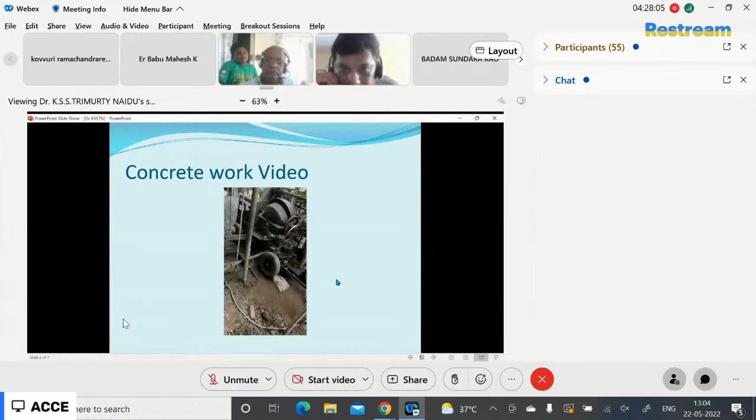Sir, now in the video, it is recorded: an apartment slab is being cast. The slab work is in progress. He is pouring water into the mixer at his own wish, more than 25 to 30 liters. So the water cement ratio is approximately 0.5 to 0.6.

The slump is more than 20 or 25 centimeters. The concrete is just flowing because of adding water. Each floor has 4 apartments, so it is 20 apartments in the 5 floors. The slab is being executed in this manner.

It is one of the apartments in Guntur. See, they are pouring the water for the workability, simply for the workability. There are no admixtures, no plasticizers, no water reducing agents, simply adding water. This is a major structure.

Number one, sir. Here, so why do we need chemical admixtures? To increase the mechanical properties, sir, there are different types of admixtures. To improve the mechanical properties: compressive strength, flexural strength, split tensile strength. There are, say, water reducing agents, superplasticizers, and so many other materials for increasing mechanical properties. What types of chemical admixtures are to be used depends upon the mechanical properties which a designer defines.